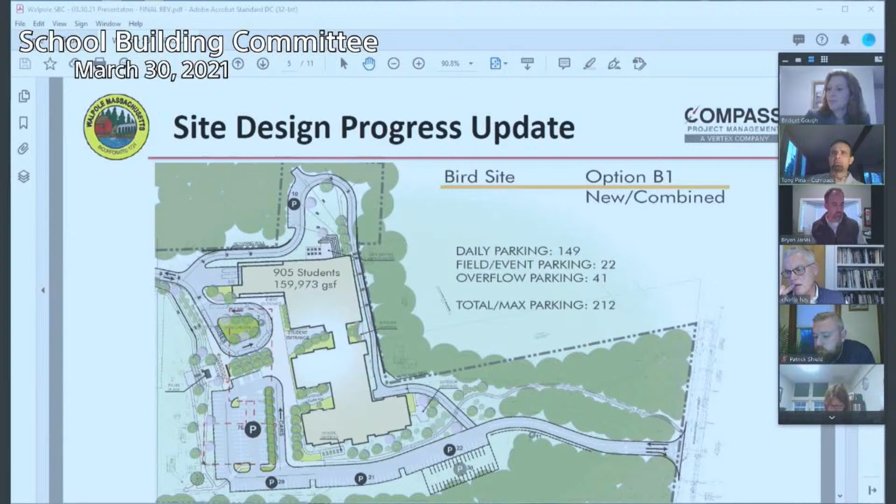Okay. So at this point, TAPE and their consultants are going to take over screen sharing with their drawings. So Patrick, I don't know if you enabled Liz Peart as a co-host. I also need TJ Johnson as a co-host. I think Bridget's the host of this meeting. Oh, she is? Sorry. Give me a second, and I have to see everybody in the presentation. It takes me a little bit. No worries. So we have Liz, and then is Chris on with us yet? He is not. All right. Well, when he joins, he has some drawings, those site sections to share. And if he doesn't join, we should just move right to landscape, which is what we're really here for. Okay. Liz is all set, and who else? Tony? Liz, TJ Johnson from Warner Larson. Okay. And then Will Schieffer from Nitsch Engineering. Okay. Liz is all set if she wants to start. Okay.

Good evening, everyone. First of all, can everyone see the screen clearly, the cover sheet? No. No, user error there. How about now? Yep. Okay, very good. So I have about 10 slides here, which are going to be a summary of that traffic memo that was submitted, dated February 22nd. I will try to be quick so that we can get to the discussions of recommendations at the end of this. Just a quick question to the chair of the group. How should we handle questions? Should I proceed through the 10 slides and then stop at the end, or are we going to do intermediate questions? I think it might be best to wait until the end because it's difficult to see who wants to speak at any given moment. So I think we should wait till the end.

Understood. So with that, the transportation study that we conducted for the middle school project includes two primary focuses of analysis. One, the existing conditions, what is out there today, and then a future condition. So to analyze those existing conditions, we conducted site visits, as Tony mentioned, not only to the school, but also to our study intersections. We collect traffic count data, and I would note here that those were conducted within the last couple months, so they certainly reflect a COVID condition, and we are aware of that. Not only is general traffic lower, but the school itself is operating at lower student capacity.

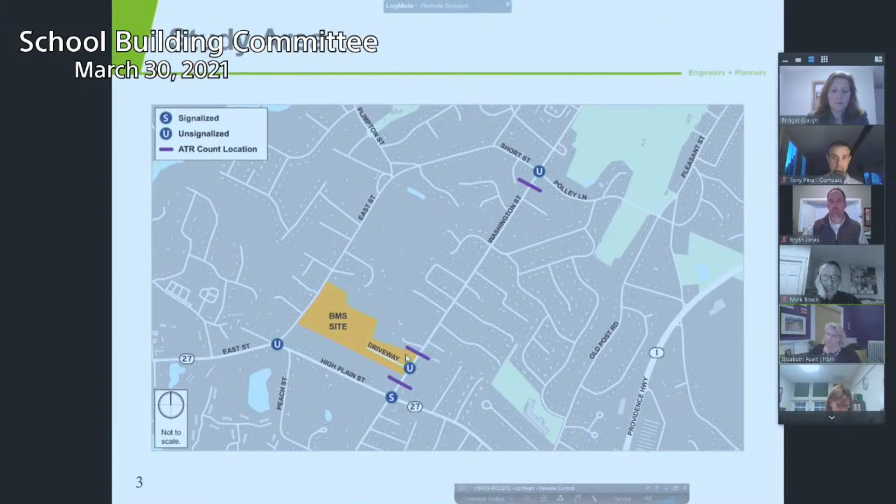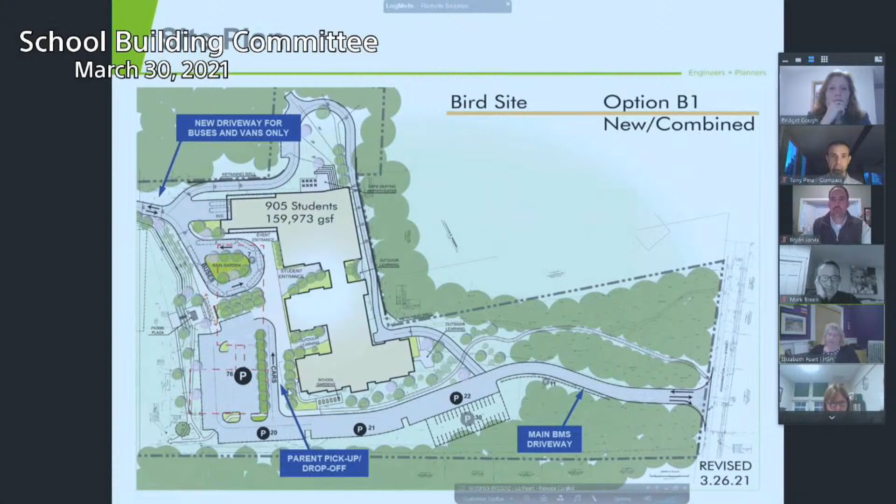There's a new exclusive driveway to East Street, obviously not shown in its entirety here, that will service exclusively buses and vans. So this is a really nice aspect of the project by separating the buses and the vans from the parent activity. It certainly works to enhance bus service and bus reliability.

Key characteristics of the existing site and the future site. I'm sure you're familiar with these numbers. Students, approximately 400 today. In the future, we're looking at approximately 900 students. I would note that that includes growth. The existing population today is approximately 820 between the Bird School and the Johnson School. We anticipate staff to increase from about 70 to 120.

Buses, based on the current percent usage of the student population, would increase from approximately 10 to 23, and that includes both buses and vans. Parking spaces increasing from approximately 75 up to 150 for daytime use, and slightly more for event purposes.

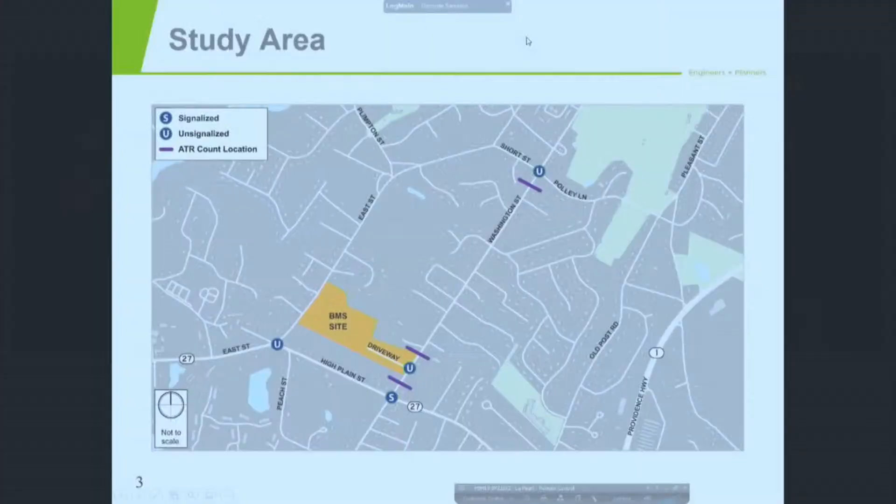Sure. Thanks, Chris. TJ Johnson with Warner Larson Landscape Architects. I'm associate principal. I'm representing our firm tonight. I think there may be a few other folks listening in, but I'll be the main talker tonight. So thank you for having us. And I'd like to just show the overall, sort of a pulled out view of the site. Can everyone see the screen now, which shows the white footprint within the property? And Liz, thank you for describing the circulation of the buses and the cars, how that works. That'll save me a little bit of time.

I do want to touch on a couple other items, and I know vehicular circulation and parking are always some of the main items when it comes to doing the site planning for a property like this, but also obviously phasing this in with the existing building in operation at the same time. A lot of things to consider, a lot of different moving parts. But what I can appreciate about where we're at now with the design is the car queue and the bus queue on this property are great.

They're a great asset to have because they're so long that you can fit, you know, more than 90% of the schools out there. You have on-property queuing space to accommodate dozens of buses, dozens and dozens of cars. That doesn't mean it's perfect, but compared to other schools, it's a great start. So I just want to have a couple slides here.

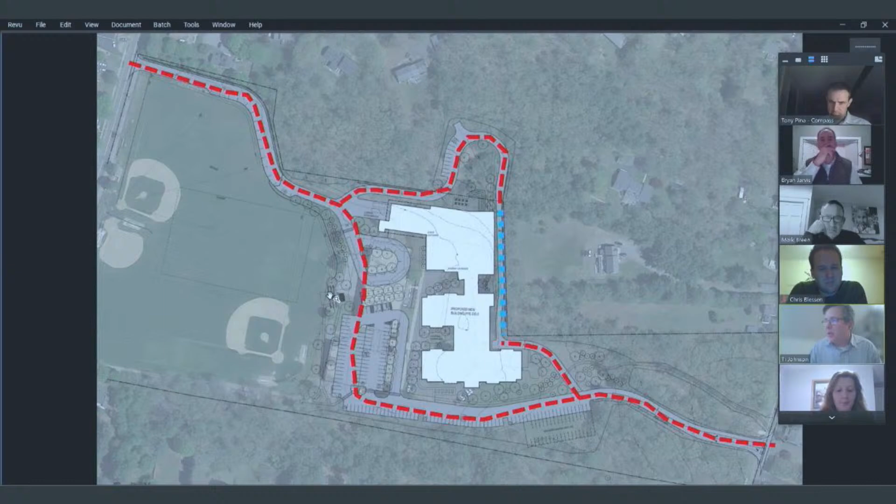But the red would be sort of the limits of where a large fire truck with a ladder would go. And so those vehicles would need to back out of those areas. They could pull up and then back out into the main circulation. So I just wanted to bring that to everyone's attention. One other point I want to make is the building location. On this slide, you can see the red dashed line. I think most people are familiar with this plan. The red dashed line represents the existing building.

The new building is, for lack of a better term, shoehorned in there between the property line and the existing building. So the other thing you need to consider is not just access around it, but the elevation of the new building. We're proposing an elevation approximately 4 to 5 feet higher than the existing building. What that does is it minimizes the retaining wall along the back, and that retaining wall would be along here, if everyone can see my cursor, the little hand. And that wall is about 5 to 8 feet high, 8 feet on the max side.

So you would be creating a wall just off the property line. We're also looking at how much cut and fill and balancing the earthwork we can do when you put that new building in. There's a lot of drivers for what determines the finished floor of that new building, but we think we have it in a good spot now. It is higher than the existing one.

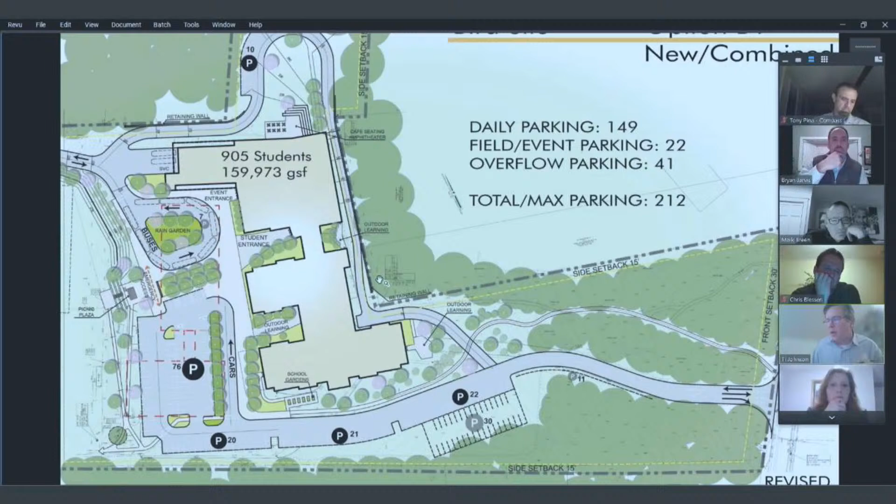Pedestrian circulation is an important aspect here. We talk about cars, but also people. So what we have planned right now is continuing to use the existing walkway through the woods from Washington Street, but with improvements - widening it, possibly clearing a little bit of the forest next to it, and selective clearing the low understory, then connecting that walkway around the side.

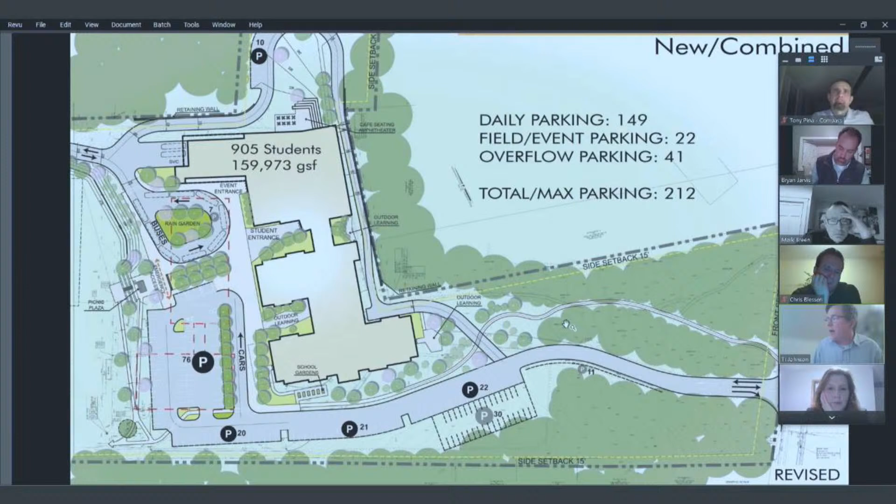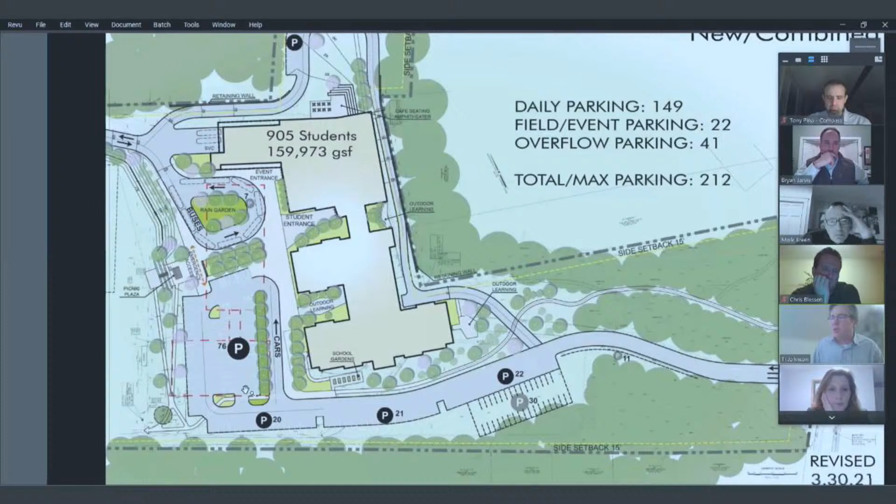And then where the cars pull up, there'll be a nice, generous, wide circulation area for drop off for students to go into the entrance of the building. But we also want to make sure we have accessibility down to the fields.

I'm just going to zoom in a tiny bit here. So that's what you're seeing over here with these sort of crisscross walkways, and then connecting into the existing walkway that's running along the southern property line that connects out to East Street.

So we're going to continue - that's going to be an existing to remain condition. You're going to connect into that and then have accessibility up through the parking into the school and out to Washington, as well as across the side of the parking lot to the central pedestrian zone in the middle here, which has, here you can see the emergency access.

And obviously there's a little hill there we're thinking about, how's that parking gonna transition to the hillside? And so that's why you see sort of these long pathways that would be fully accessible under 5% slope.

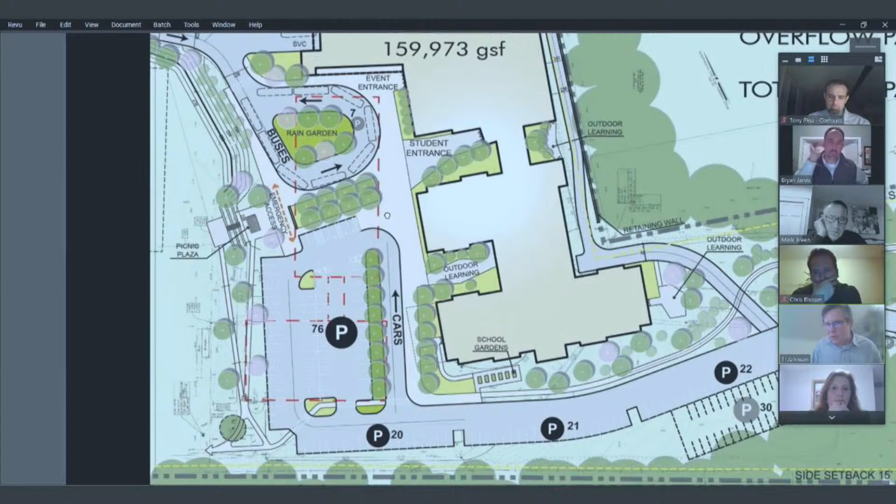So we are including several outdoor landscaping sort of spaces for outdoor learning, casual seating areas for small gatherings, as well as a school garden. So those are all shown on the plan. I think at this point we haven't designed them - they're more spatially focused about how much space you might need for these things and how much pavement versus landscape versus lawn and trees and so forth.

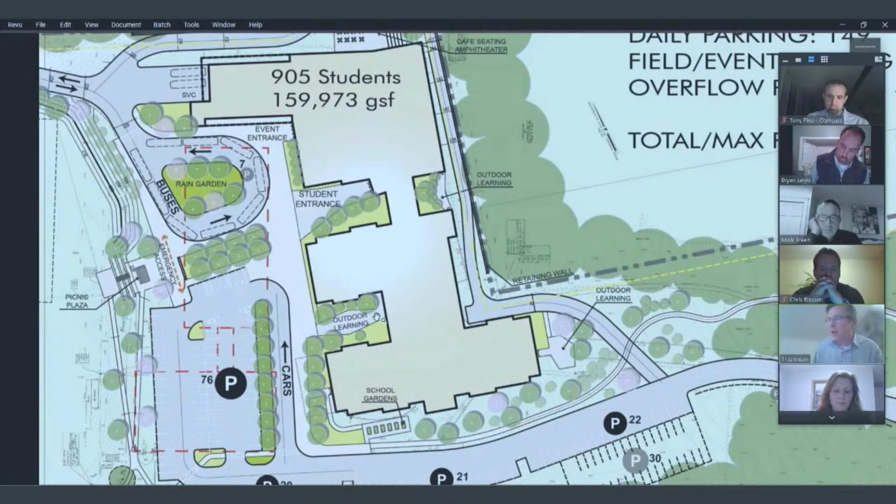So that is a diagram, essentially a concept diagram as we kick off SD, showing those spaces. And we'll get into a little more - the purpose of SD is to confirm the size, the space, and the price, the cost, basically, of all these items that we can afford or not.

Outside to the north of the cafeteria would be an outdoor seating area with a little amphitheater that would sort of accommodate, pick up the grade, so work with the grade, so that could serve as casual outdoor seating or a small group gathering as well.

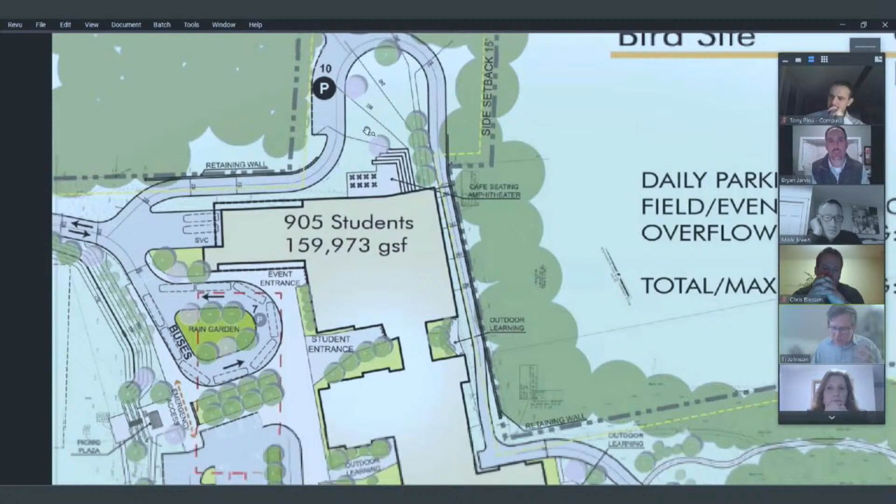And let me get into the parking now. That'll be my last topic here, I think, that I want to touch on. And I know that's always a contentious issue. Right now, as Liz mentioned, there's 212 spaces max, and we've broken them up into a couple different categories.

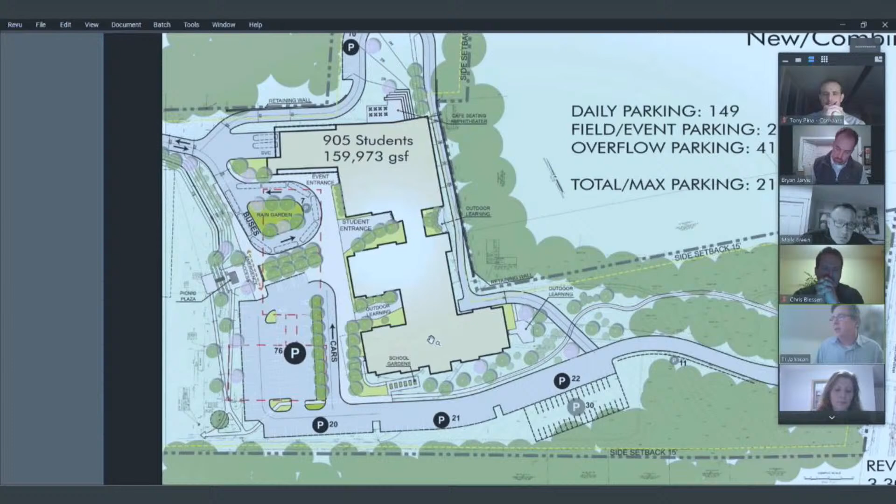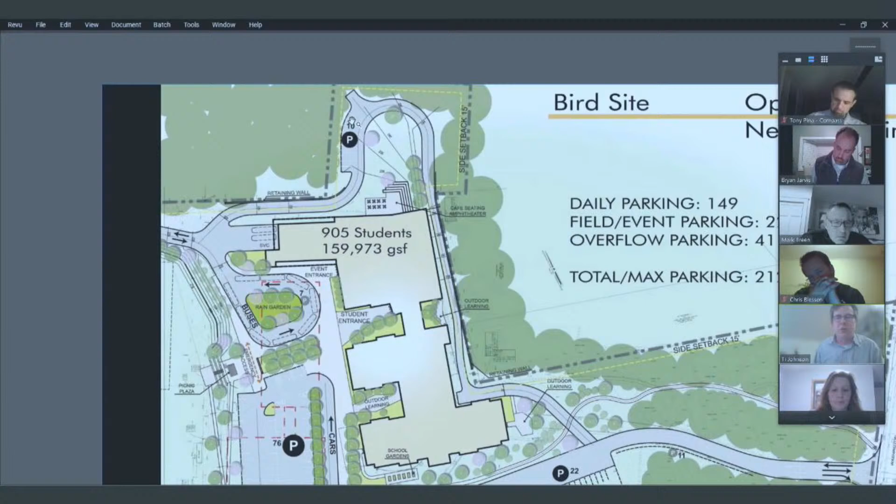The daily parking includes all the paved surfaces that come off Washington Street, but also there are 10 spaces reserved sort of up beyond the service area, which I should point out is right here. So those 10 spaces to be used by staff - we were thinking maybe the early arrivers - because the bus loop itself, while it's restricted for use during school hours, after school hours it would be a community asset where people could go and park in that bus loop.

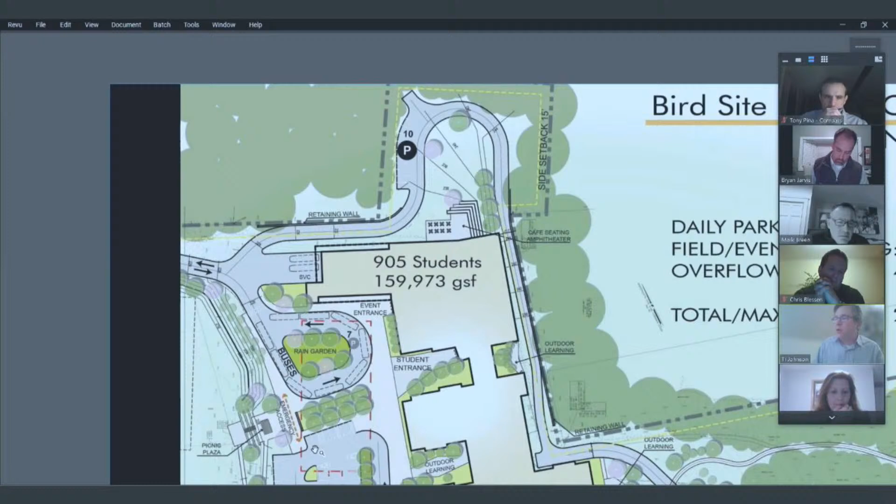So what you're seeing here is we actually show 7 parallel parking spaces around this loop. Now, you wouldn't want to fill it up because you still need to maintain emergency access. But likewise, the East Street driveway - and I'm going to flip back to this one and zoom in here - would have, we're showing 15 parking spaces along, these are parallel spaces along this driveway, which also could be used for the fields or an event, an after school event at the auditorium and so forth.

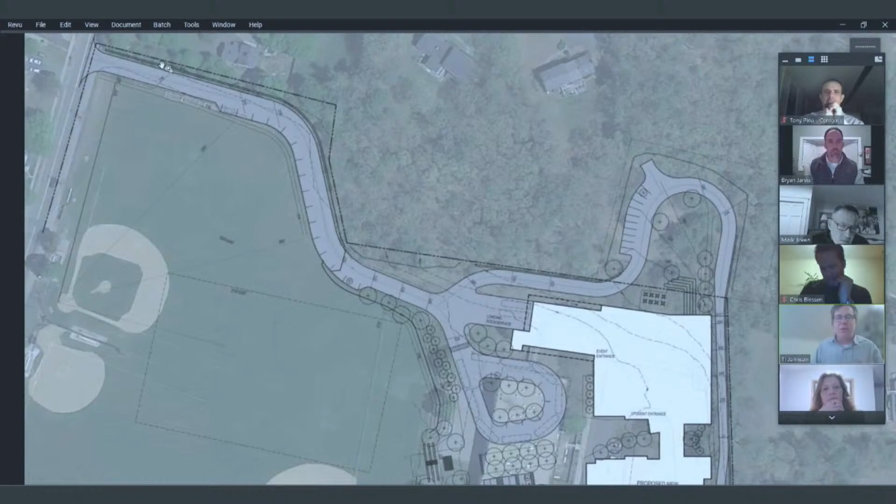And you know, we're treading carefully here because we know that these fields need to remain in use. They're very popular with the community, and so adding this roadway is obviously going to have some impact, but we believe we've come up with a solution where there's minimal impact by hugging this property line with this driveway, and this large baseball field, the center field is nice and deep, so that's where we're putting the parallel parking.

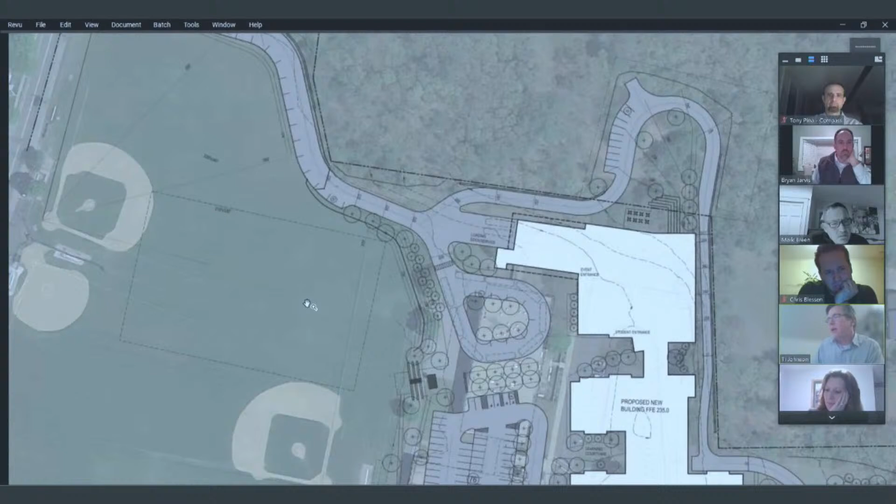And then you have a rectangular field that would need to be shifted a little bit to accommodate this side slope as the bus loop comes up. So we've looked at all these things in detail already. Not to say that in schematic design we're going to keep going with it, but that's where we're at with those items.

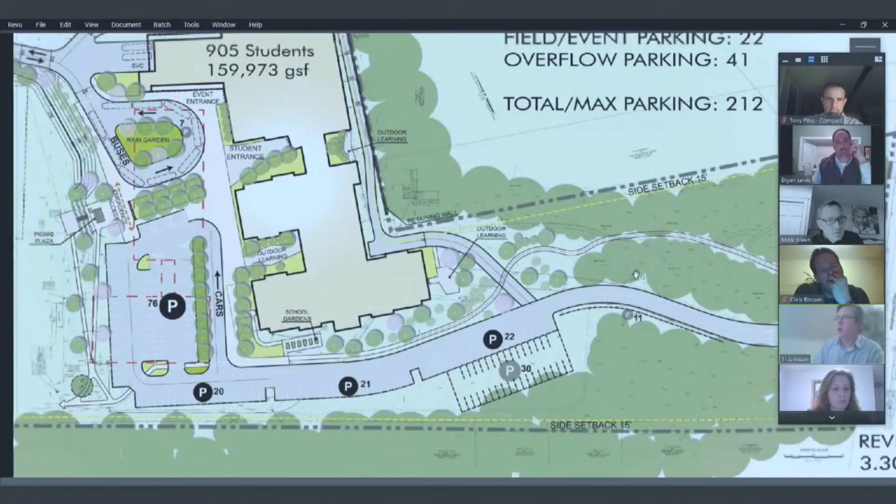Field event parking on this diagram is 22, which represents 7 spaces around the bus loop and the 15 spaces I just discussed. And then the last overflow parking, which at this point we're not even sure if it would be paved or not, but this would be pull-off parking. It could be stabilized lawn, gravel, or paved. You could have 11 parking spaces parallel along this driveway. Also, we have an open field where we could choose to use that as overflow space.

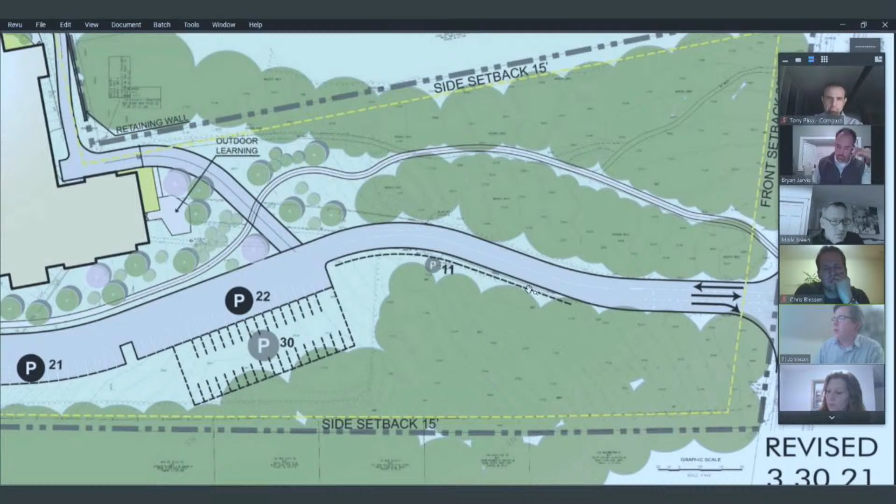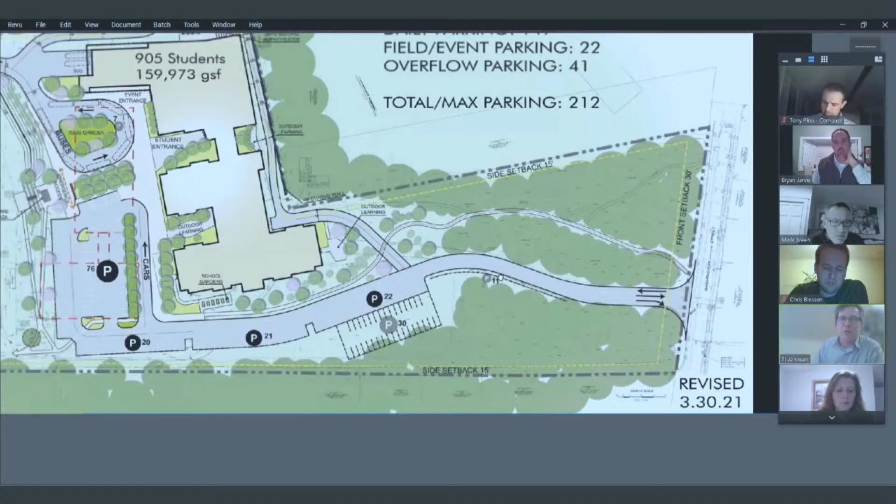At this point, we've preserved this beautiful wooded area between Washington Street and the school. That's obviously a very important thing, a beautiful feature. If additional parking were necessary, once there's a consensus on how many spaces are actually required, we can look at filling in some of these spots while still preserving that asset.

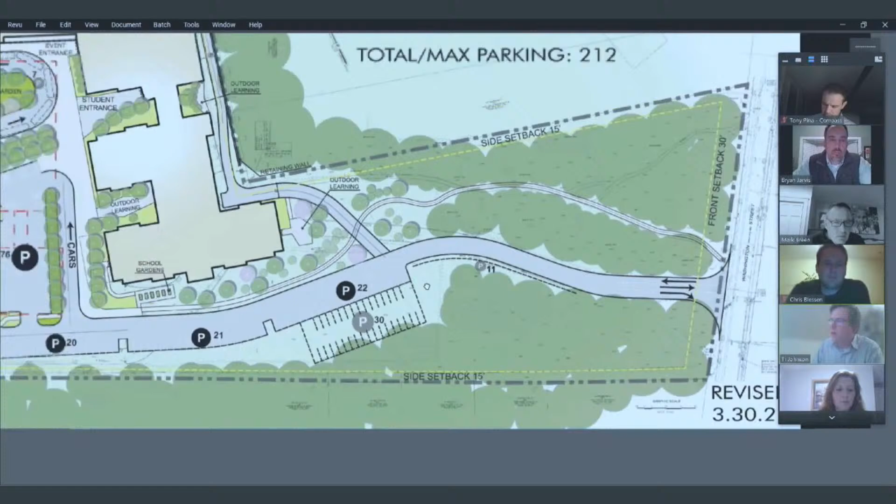I think that covers most of what I wanted to talk about. So I appreciate you listening, and if there's any questions, happy to take them.

Thank you, Mr. Johnson. Does anybody have any questions or comments? I don't see anybody. Very good. Mark, I just couldn't find my hand on there. Okay, yep, Ms. Gallivan? Yep.

Thank you. I probably should have asked this prior, but have our police department and fire department had input to these decisions, or suggestions? Yes, we've had a meeting with many of the town's DPW, public health, and public safety officials, and that's actually where the access across the middle to connect the bus and the cars came from. They requested that, and other things too that we've been working to accommodate.

So, Nancy, we'll be having subsequent meetings, at least one more with them as we develop the design. We actually have that in the work plan, another sit-down with police and fire. And they also sent us the specs on their apparatus and turning radiuses too. Okay, yeah, I kind of assumed so, but I didn't want to assume.

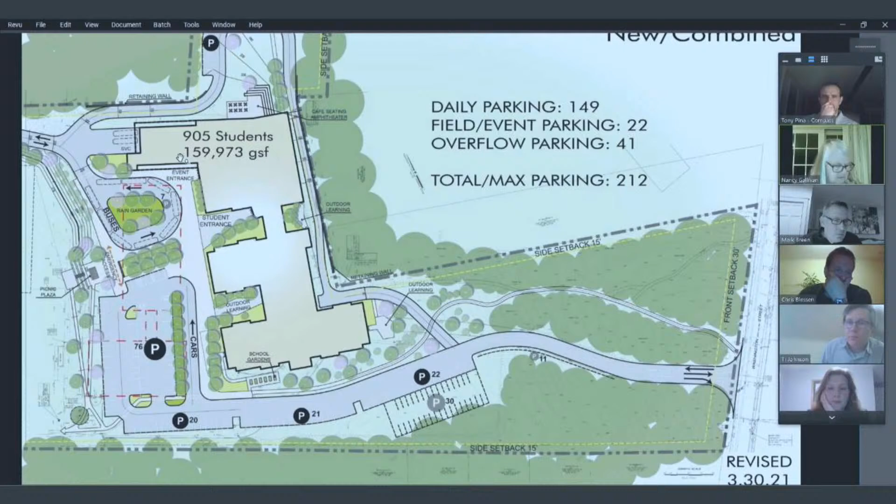I have two other questions. You're talking about, and I see it marked that there's a student entrance, but how many different ways are there to enter and exit this building? There's the main entrance, which is where the student entrance is, and then each wing has another potential entrance in the middle of it, and then there's the annotated one here. So there's the main entrance, and then there's one at each end.

Okay, and then there's an event entrance as well. So I think there's at least 4 on the front, 1 on the side, and there likely will be something over here as well to service this outdoor learning area, but I wouldn't really consider that a major access point. Those other ones are the main ones right now. There'll be egress doors all around, Nancy. Yeah, I assumed that, but when I just saw one entrance marked, I thought that would be a problem. Okay, and then my last question is about the roads you're talking about cutting in.

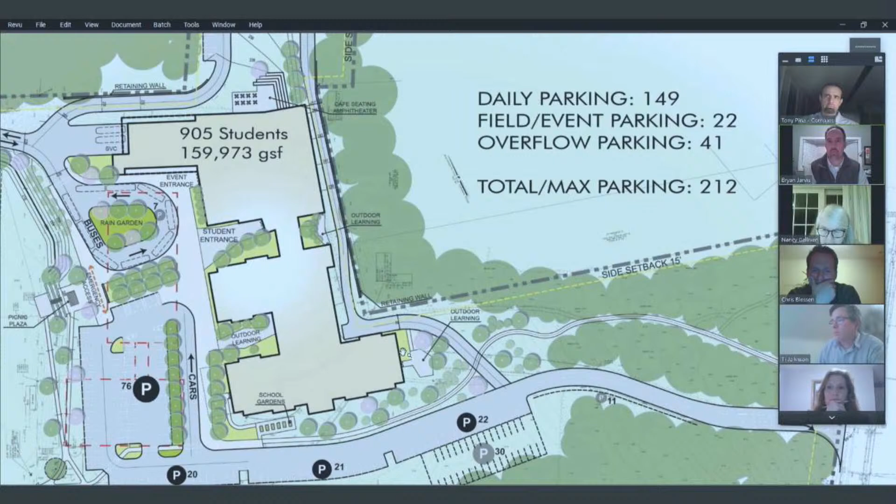At least one road going out to East Street and potentially a second one. What would be the timing on that? What would be the soonest that you would want to cut that road? Thinking at least the bus loop would be one of the first things completed, or at least roughed in. Right now this project we've been talking about going construction manager at risk. One of the benefits of that delivery method is we'd be able to do early release packages, including an early site package, which would mean we could procure the site contractor ahead of other contractors and get started on that scope of work sooner.

And the thinking is that would serve as the construction road during the project, to alleviate as much as possible any construction traffic mixing with normal school drop-off traffic coming off Washington Street. So there's no chance that it would affect fall sports this coming fall, correct? Oh no, no. It would be a year off at the soonest? Yes, it would be the end of 2022 at the soonest. Most likely, but that schedule is still to be determined.

Yeah, I just wanted to be sure we give people time, for those who might have to adjust. Oh yeah, that's not until end of '22 at the earliest. Okay, great, thank you. Thank you, Ms. Gallivan. Anybody else have any questions or comments?

Before we move on, can you draw one of your red lines on where the East Street one-way traffic would be? It's a long path. The concept is this, but we haven't spoken with Ty and his team about it yet - it just came up Thursday afternoon. Parking hasn't adjusted to that yet, but the concept is if we could sneak a roadway here that's one lane, one way, we might be able to put another relief valve for traffic up at the intersection. That's the theory, but we need to keep chasing it and designing around it.

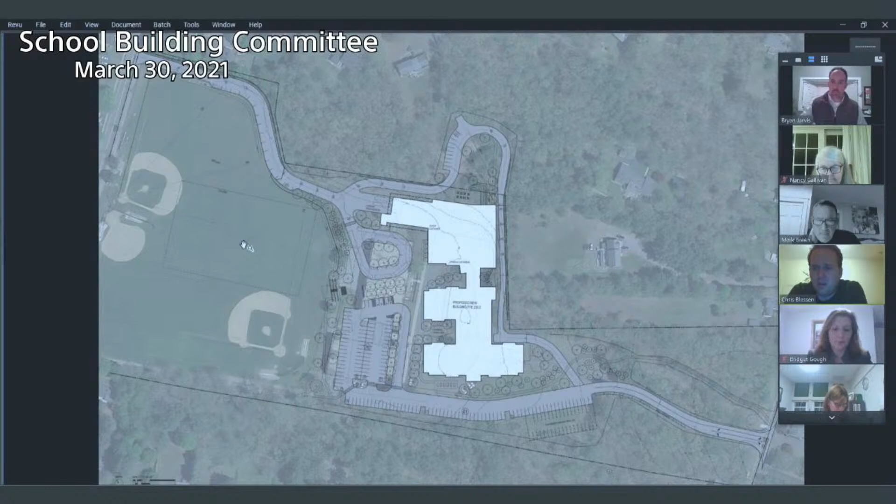Yeah, I think we'll move on to Will Schaefer from Nitsch Engineering - they're the civil engineers. I don't suspect this conversation will take long, but they've done some work, and I want to give Will the chance to show their current thinking on some of the utility infrastructure we're looking at. Then after Will goes, I'll show you a couple slides of further development we've been doing.

Just let me know if you're seeing my screen - it'll be real short, pretty much just one slide going over what we're thinking as far as utility connections for this project. One major concern from a utility standpoint is we're definitely going to be increasing impervious area on this site with this proposed plan, so stormwater management is going to be key. We'll have to conform with Mass DEP rules, so we can't increase the amount of water coming off the school with the increase in impervious area. Usually we mitigate that with infiltration - you see that scattered around these areas. We'll be using underground infiltration, targeting above-ground BMPs where possible. It's a tight site and we're grading pretty significantly, so areas available above ground may be limited, but we'll target our management in these underground areas scattered through the site plan.

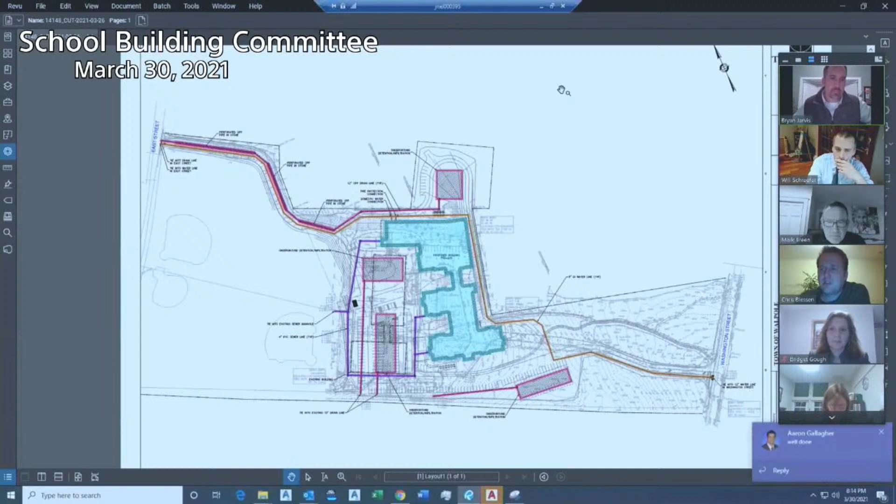Yeah, I think we're good. Chris, you have updates? I will share my screen now. Let's see.

All right. Okay. So we wanted to talk through, let me get rid of this little, everybody can see my slides, okay?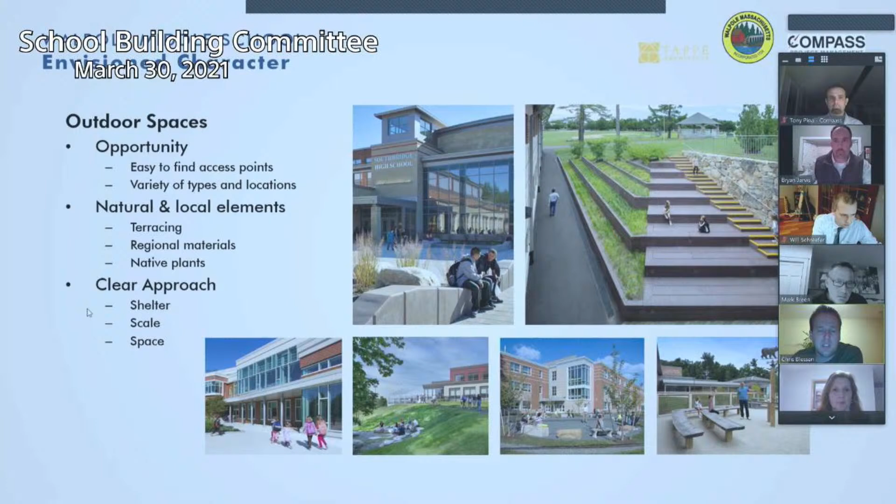And then we also want to make sure that as people approach the building, that it's clear, and that there's some shelter provided, and that there's scale and space created along those places. So you've seen a lot about site plans today. Here is a drawing that shows the actual floor plan layered into those drawings. Slightly outdated version of what Ty just showed you, but the key thing to note here is that we're actually planning some spots in the site plan for future expansion, which are these red dashed boxes on the end of these two wings. And so while we're not designing that, we're actually thinking about it in terms of infrastructure and layouts for site and things like that.

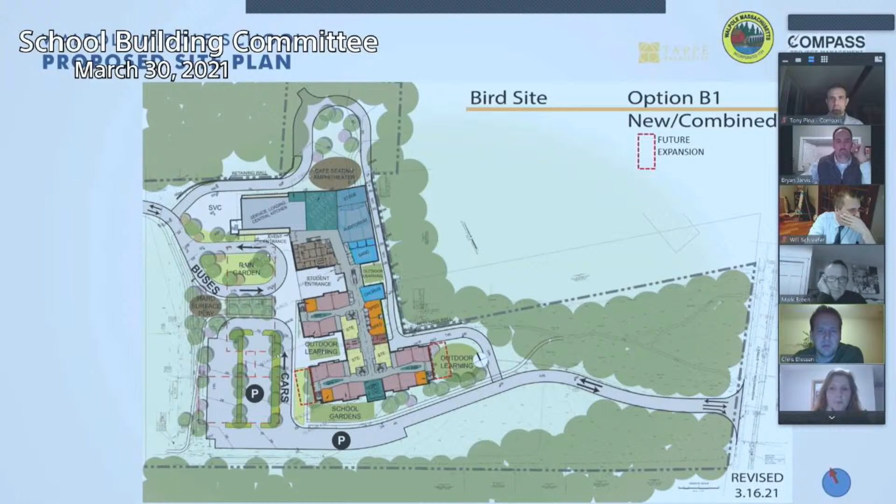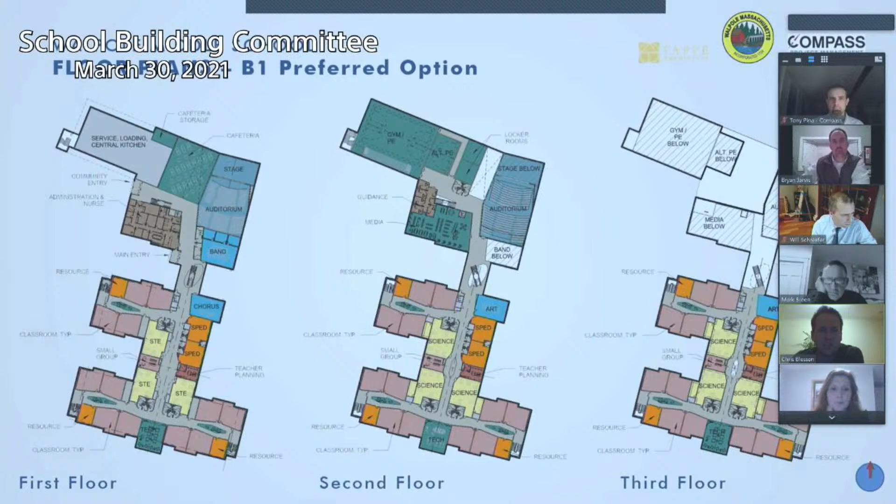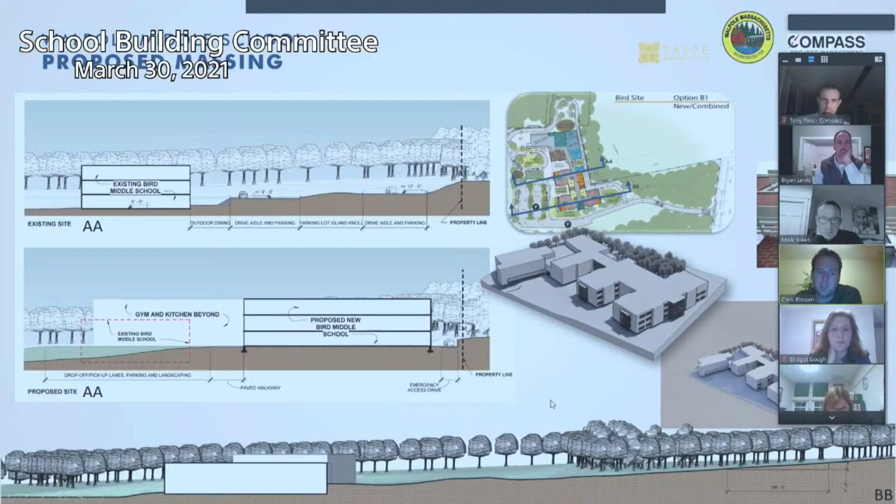And on the right-hand side up towards Washington, that whole end of the site is really, every 100 feet you go, you've raised 7 feet up in the air. And then when you get to the middle of the site where we're talking about putting the building, you can see that it sort of flattens out with a little bit of undulation there. So that bottom section helps clarify some of the topography that may not be exactly noticeable when you're on site itself.

I think I've presented these diagrams previously, but these are just some of the key aspects again. We've talked a lot about car traffic and access, which is the first left image there. The middle image being the way the building can break down between school and public use, and then the team structure in the wings. And this is a little breakdown of how the teams could actually work, knowing that some of the designations of these classrooms may be different, but these are the basic building blocks of how that works. And then the vertical connectivity and structure between arts and music and gyms and media.

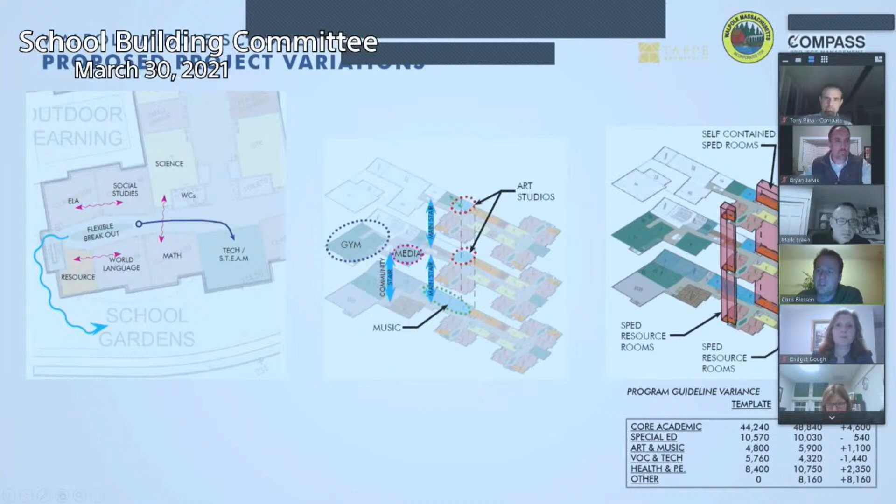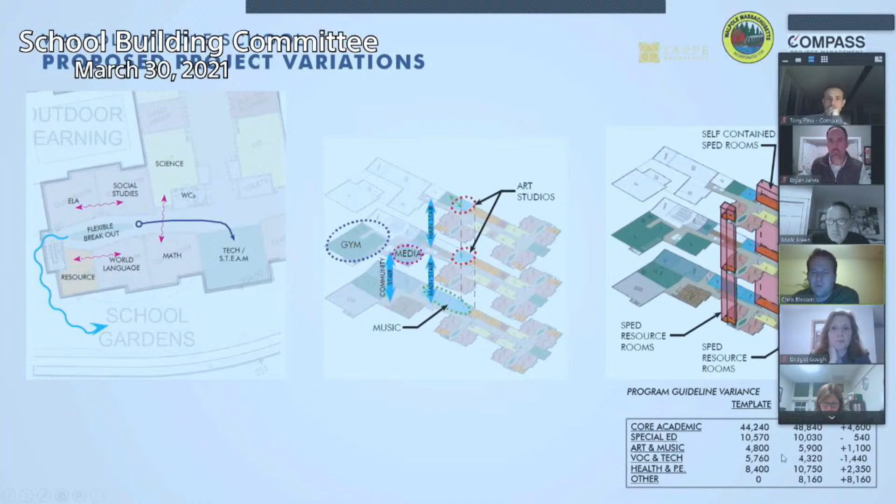And then on the right, the integration of special education to the rest of the building and floor plates. And on the bottom right is a little table that talks about the program variance to the MSBA guidelines. And really you can see the biggest one there is the other category, which is your auditorium and extra gym. So that's a whirlwind of what I have. And I think, Bryan and Tony, that rounds out the design team's conversations for tonight.

Max, any questions on anything from Chris? Back on the floor plans. All right. Jack, you have a question? Might be on mute. Hi, can you hear me? Yeah. I have a question.

One of the comments you made was, as far as the entrance was concerned, you wanted to make it very clear and apparent where the entrance was as you approach the building. But the main way you're going to get to the building, you're going to arrive at the back corner of the building and have to drive around to the front. And the parking area and the turnaround for cars coming in isn't even going to be in front of the main entrance. It's going to be set off to the side. So I'd ask you to take a look at that.

I agree with you that you really want to make it very clear where you're going to enter the building. I won't say a grand entrance, but an entrance that shows very clearly where people should enter and what the building's all about. But you're approaching the building from the back left-hand corner, then driving around to the front, but you never really get close to the front entrance. You're in the parking lot set off to the side. So I'd ask you to take a look at that. Yes, sir.

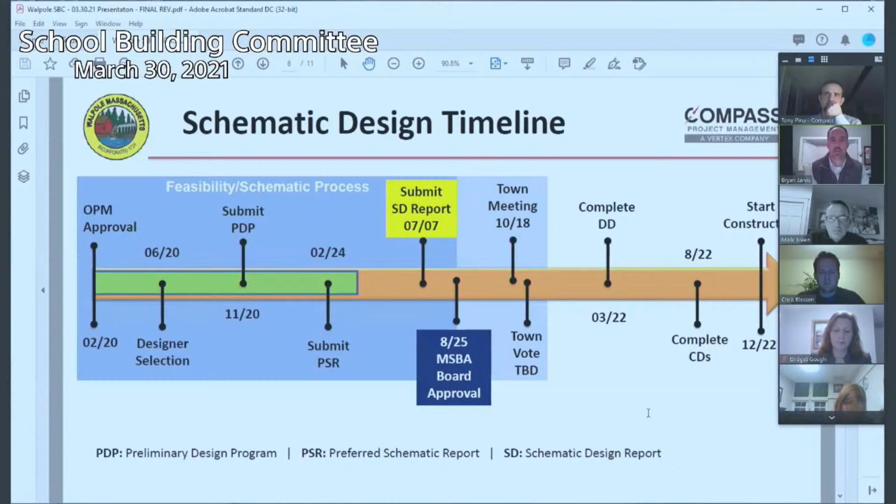the town vote. Working through the deliverables for schematic design, again, roughly 30% of the design will be completed at the end of schematic design with those deliverables there. The big takeaways being the project budget, the construction cost estimate, which will then be used in negotiations with the MSBA to set up the maximum reimbursement, which we talked through at the last meeting.

We'll have a project schedule that we'll start to design to, as well as a construction schedule, and all that gets submitted to the MSBA by July 7th. So the end of June will be very busy with updates to all the town boards and committees and a final vote by this committee to submit the package by July 7th.

And just another update, some of you might be aware, we have another community forum targeted for next Wednesday night, April 7th. We did get a mailer out to folks in town through the town's contacts. I think every resident, every door should be receiving the save the date mailer, just to get more of an audience, hopefully, for this community forum. So we'll have an update with a lot of the things you saw tonight, as well as a summary of costs and potential tax impacts that we talked through at the last meeting.

All of these meetings, everything's posted on the website, but again, just trying to drive some more traffic. Now that this project is getting into the stages of getting close to town meeting this fall, we're trying to get more people aware of what's going on, answer as many questions as possible, and hear any concerns or issues that people might have. So that's out there. If you hear about it, that's next Wednesday. We're putting together a presentation and presenting that.